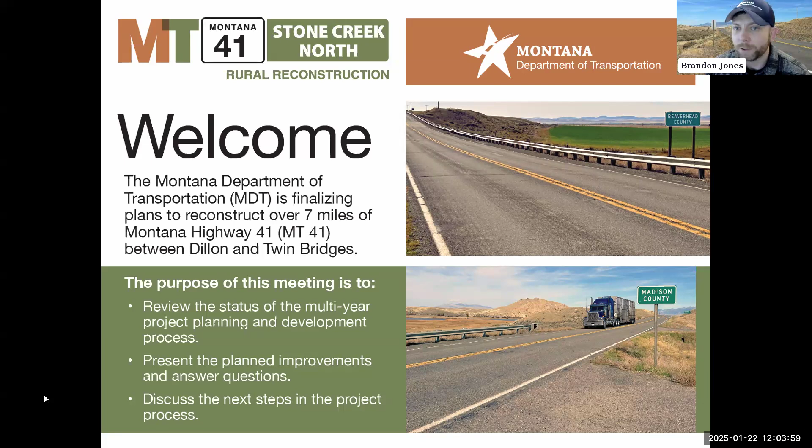And now I'm going to turn the microphone over to the MDT Butte District Pre-Construction Engineer, Brandon Jones. Brandon? Good afternoon, everybody. I'm Brandon Jones, the Butte District Pre-Construction Engineer. I also have here with me David Cunningham, the Butte District Construction Engineer. I just want to read MDT's mission statement before I introduce everybody. MDT's mission is to serve the public by providing a transportation system and services that emphasize quality, safety, cost effectiveness, economic vitality, and sensitivity to the environment.

MDT maintains a staff with the resources and technical expertise needed to perform the workload for the majority of the state's transportation projects. I'm now going to introduce some of the project development team, as well as some district folks, and they'll turn their camera on and introduce themselves. So Rebecca Barbula. Hi, I'm Rebecca Barbula. I'm the Butte District Design Project Manager, and I'm located in Helena Road Design. So my team is responsible for producing the plans and contract documents for construction, and then I'm responsible for managing the project's scope, schedule, and budget.

Thank you, Rebecca. Gino Oliva. Good afternoon, everybody. My name is Gino Oliva. I'm the Butte District Administrator, and I have my office here in Butte, and I supervise Brandon and Dave's groups. Thank you, Gino. Patrick Cross. Hi, everyone. My name's Patrick Cross, and I'm the MDT Butte District Biologist. My role is to work with the design team to minimize environmental impacts, ensure compliance with environmental regulations, and also work with Montana Fish, Wildlife, and Parks on any fish and wildlife concerns that they have.

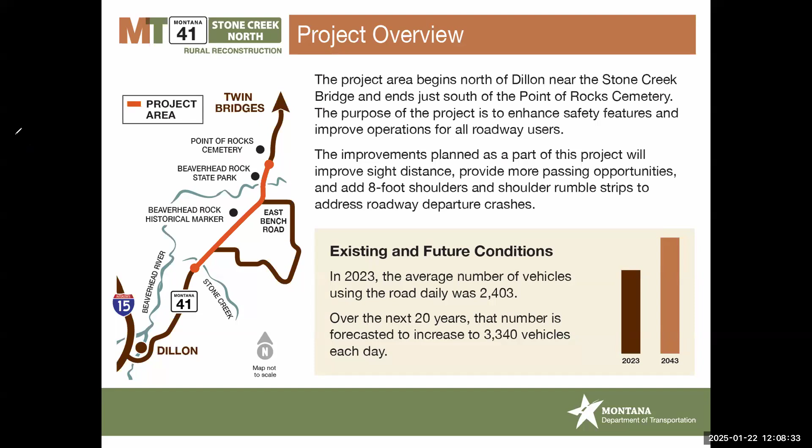MDT began developing this project several years ago. Initial work included gathering and analyzing data, performing field studies, and hosting a public meeting. The information from those evaluations and the input from the public was carefully considered to develop the planned improvements that we're presenting today. This project is now in the final design and beginning the right-of-way acquisition phase.

Over the next about 2 years, MDT will be finalizing the project plans and permits, purchasing any necessary additional property that's needed to construct the improvements, and preparing for construction. The current schedule suggests that the earliest construction could begin is in 2027. Construction is anticipated to take 2 full construction seasons to complete, so summer of 2027 through to summer of 2028.

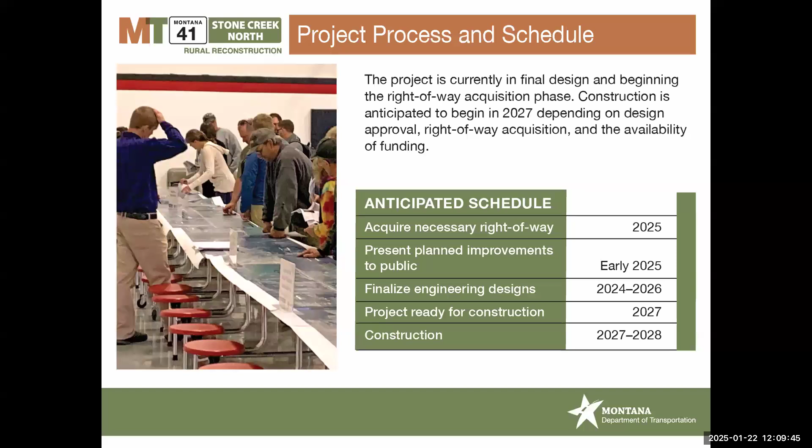However, construction is dependent on funding availability and will be scheduled once design plans are finalized and right-of-way and permits are acquired. And speaking of funding, on the next slide, I'm going to share some information about project costs and where the funding for the project is coming from.

This project is currently estimated to cost about $36 million to construct. MDT has acquired a $23.9 million grant from the Multimodal Project Discretionary Grant that comes from the Infrastructure for Rebuilding America grant program. This grant is overseen by the U.S. Department of Transportation's Office of the Secretary of Transportation.

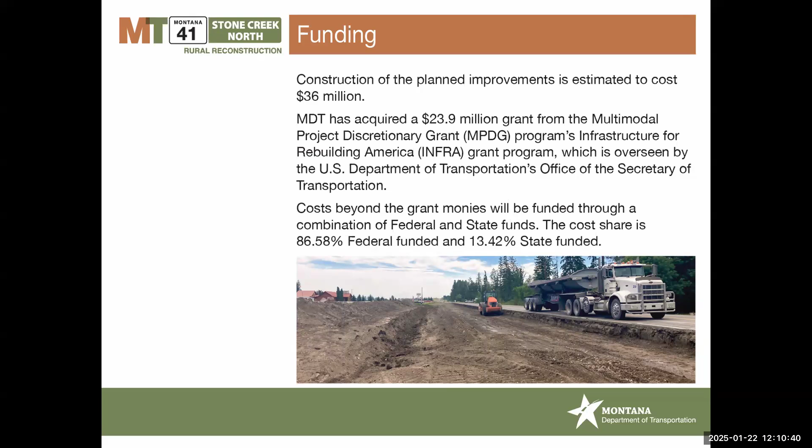Costs beyond the $23.9 million grant monies will be funded through a combination of federal and state funds. The cost share for that is just under about 87% federally funded and about 13% state funded. On the following slides, the design team will talk about planned improvements and design considerations.

As mentioned previously, Highway 41 is currently narrow with steep slopes on both sides of the road and limited sight distance. MDT plans to implement several improvements with this project to enhance the safety features, such as realigning the road north of the Beaverhead River. We're also going to be reducing the vertical grade, that's kind of like the steepness,

of the hills. We're going to be adding 8-foot shoulders, adding shoulder rumble strips on those new 8-foot shoulders and replacing the centerline rumble strips. We're also going to be flattening steep slopes on the side of the roadway and upgrading guardrail and drainage. I mentioned at the beginning the realignment of the roadway north of the Beaverhead River, and I'm going to talk about that a little bit more on the next slide.

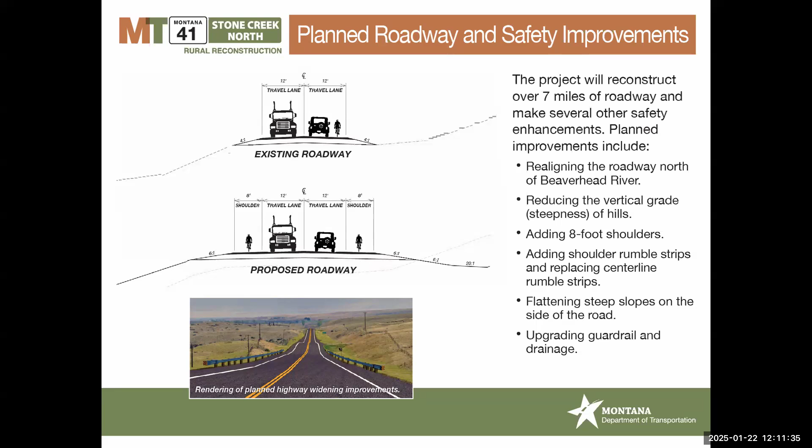MDT teams involved in the design criteria analysis and evaluation included road design, which is my section, the geotechnical section, which is soils and roadway foundation, environmental, which is wildlife, wetlands, permitting, hydraulics, which is drainage, culvert drainage, and irrigation. And then we also had construction and maintenance. That's just to name a few of the various disciplines that were involved.

Additionally, MDT coordinated with external sister agencies on setting the alignment and grade, including the U.S. Army Corps of Engineers and Montana Fish, Wildlife, and Parks. Now I'm going to turn the microphone over to Sam Ulrich, and he's going to talk about environmental impacts that we considered in our design.

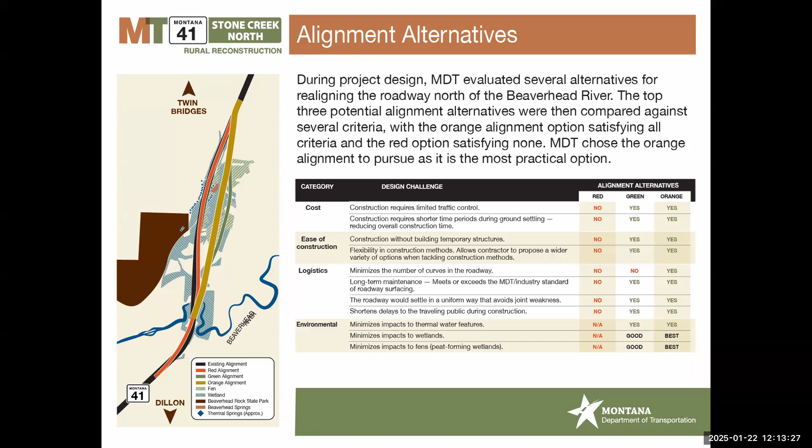Thank you, Rebecca. As with any federally funded project, MDT needs to ensure the project is compliant with the National Environmental Policy Act, often referred to as NEPA, and its Montana companion MEPA. Using the NEPA-MEPA process, agencies like MDT evaluate the environmental and related social and economic effects of our proposed actions. Agencies also provide opportunities for public review and comment on those evaluations and their findings.

When a proposed action may significantly affect the quality of the environment, both NEPA and MEPA require the agency to prepare an environmental impact statement. Most of MDT's projects, including this one, fall under a categorical exclusion. MDT's categorical exclusion form is basically a miniature environmental impact statement. This project is being reviewed under NEPA. This review includes a few other important federal acts.

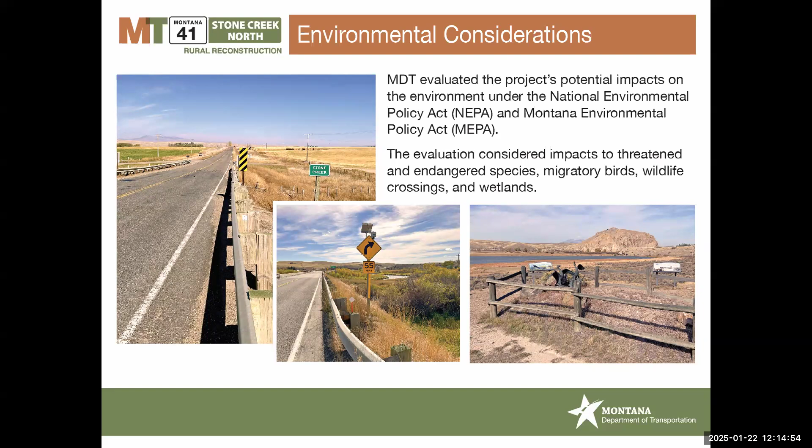They include the Endangered Species Act for the handful of listed species near the project area, the Migratory Bird Treaty Act for nesting areas on the underside of the bridges, Section 404 of the Clean Water Act for impacts to aquatic resources, including wetlands, and Section 106 of the National Historic Preservation Act for effects on historic properties. Additionally, other areas of consideration include wildlife crossings and recreational river activities.

For this project, MDT conducted site investigations to look for potential environmental concerns and document the environmental baseline in the project area. Our analysis showed that the project should include specifications necessary to protect the environment. And I will now turn it over to the biologist, Patrick Cross, to talk more about proposed environmental features included in our design.

Thanks, Sam. So to minimize our environmental impact, in addition to the design features, certain construction activities will also have seasonal timing restrictions to avoid disturbing protected wildlife species in the area and ensure compliance with the environmental regulations that Sam mentioned. Some examples include for trout conservation, there will be no in-stream construction work during the trout spawning seasons in the spring and fall. And that's part of our Montana Stream Protection Act permitting requirements, which are administered by Montana Fish, Wildlife, and Parks.

Part of the stream permitting compliance will also require that any equipment used for in-stream work is first inspected for aquatic invasive species before the project begins. For Migratory Bird Treaty Act compliance, any tree and shrub removal, as well as removal of the Beaverhead River Bridge, basically any place where birds might be nesting, must occur outside of the nesting season, which is from mid-April to mid-August. An exception could be if the contractor uses special methods of deterring nesting under the bridge, like installing nets that block access before the migratory birds arrive.

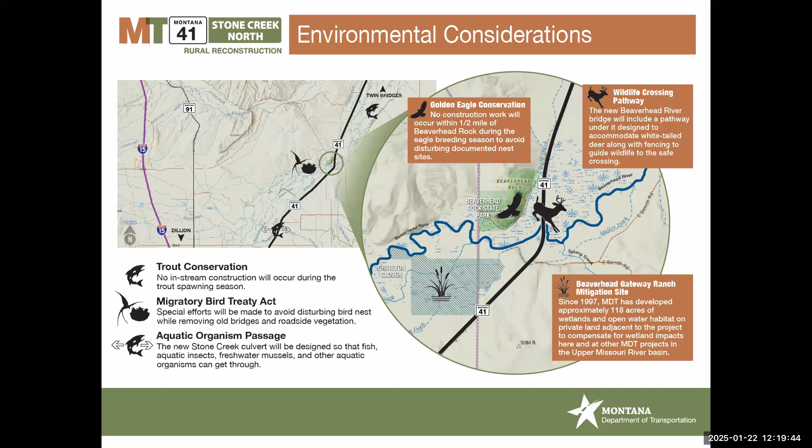And the way it works is that every MDT project is first reviewed for wildlife accommodation needs and opportunities. And if recommendations are made, those then have to work their way through all the MDT bureaus for review and final approval. So approved wildlife recommendations for this project include, and can I get a slide change, please? Perfect, thank you.

They'll include a wildlife path that will be built under the Beaverhead River Bridge that'll be sized so it has enough headroom for white-tailed deer to get through. There will also be wildlife barrier fencing, and this is 8-foot tall woven wire fence that'll be installed on either side of the Beaverhead River Bridge. And the goal of that is to help guide wildlife to the path under the bridge.

The barrier fence will also include wildlife jump outs, which are one-way escape ramps that let the animals jump out away from the road, but not jump in towards it. There will be wildlife guards, which are like double wide cattle guards installed at approach roads and driveways to help minimize the new fence's impacts on local traffic.

We're also considering putting an experimental electric wildlife deterrent mat at the fence ends to prevent wildlife from getting into the fence section. And there's an example of one of these near Toston on US 287 between Three Forks and Helena that's been working for a couple of years. And then finally, for this wildlife barrier fence section, there will also be wildlife warning signs with flashing lights at the fence ends.

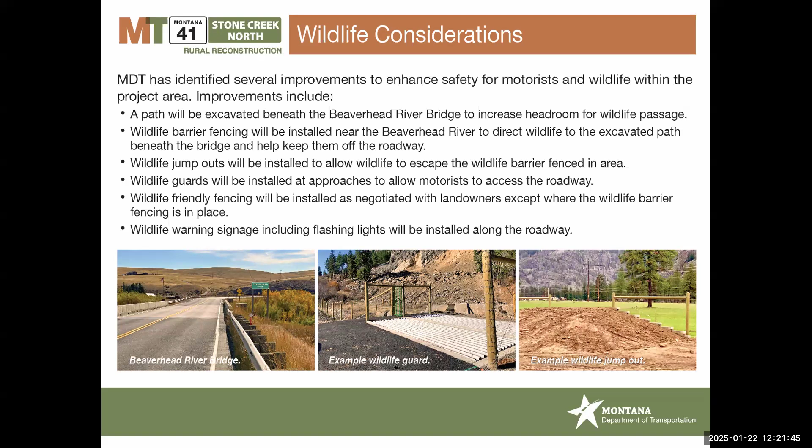So now I think I'm turning it back to Rebecca to continue talking about some of the design features in particular. Perfect. Yeah, thanks, Patrick. So there are two bridges that exist within the project limits. One of them is at Stone Creek and one is at Beaverhead River. So I'll discuss planned improvements for both of the structures.

And I'm going to start with the Stone Creek Bridge, which is located at the beginning of the project near milepost 9. So I know Patrick talked about this a little bit, but we're going to be replacing the Stone Creek Bridge with a double cell concrete box culvert for both stream and livestock passage. So MDT completed analyses to determine the culvert size that's required, as well as the location to align the stream side of the box culvert with the natural stream bed.

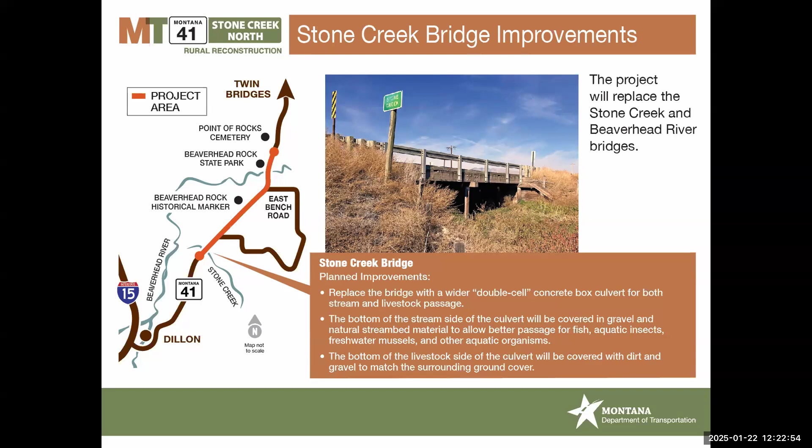And then the bottom of the stream side of the culvert will be covered with gravel and natural stream bed materials to provide better passage for fish and other aquatic organisms that Patrick had talked about. And then the bottom of the livestock side of the culvert will be covered with dirt and gravel to match the surrounding ground cover. And now I'm going to move over to the Beaverhead River Bridge.

So the Beaverhead River Bridge is located near milepost 14.7. It's partway between East Bench Road and Beaverhead Rock Road, which is the road that goes up to the Beaverhead Rock State Park. So MDT is going to be removing and replacing the Beaverhead River Bridge with a new structure. The new bridge is going to be about 181 feet long. It's going to be a single span design, which means that there are going to be no piers. And so this allows for improved movement and passage of wildlife underneath the structure.

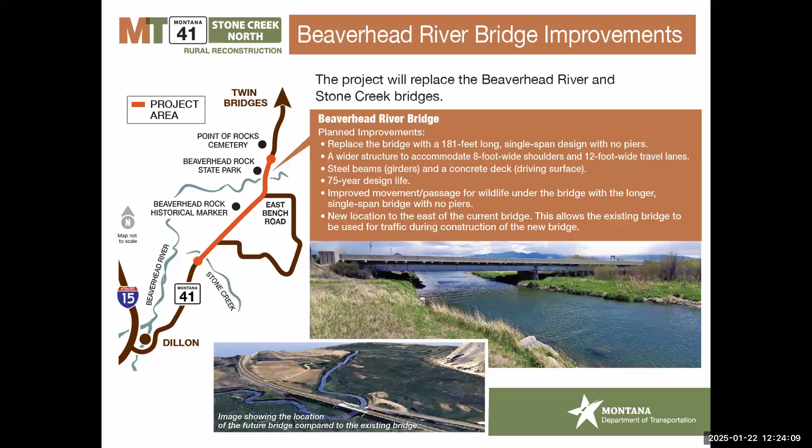Additionally, the new bridge will be widened to accommodate 12-foot travel lanes and 8-foot shoulders to match the rest of the project. And then the new structure will have a 75-year design life with steel beams, also called girders, and then a concrete deck, which is the driving surface that everybody will be using. And then the new structure will be built to the east of the current bridge, which allows us to use the existing bridge for traffic during construction. And I'll talk a little bit more about traffic control on the next slide.

So the final traffic control plans have not been fully developed. However, we're moving forward with plans to construct some of the highway and the Beaverhead River Bridge to the side of the current highway to minimize impacts and delays during construction. So mostly from the Beaverhead River Bridge, I think it's about a mile or a mile and a half to the north where we're kind of off of the existing alignment. So that's where we'll be constructing the new highway adjacent to the existing highway.

And MDT will require the contractor to keep access to homes and properties open during construction. There may be short-term closures when new asphalt is laid in front of an access, but the contractor will communicate with those property owners during those times. And then emergency vehicles will always be accommodated through the construction work zones as well. And we will have more information about traffic control and how to stay informed as construction gets a little bit closer.

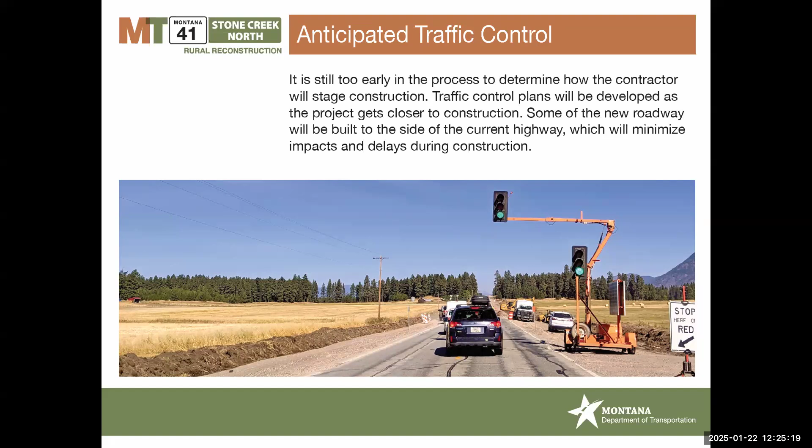So now I'm going to turn the microphone back over to Brandon Coates from RBCI to talk about the next steps in the project. Thank you, Rebecca. Yeah, as we discussed earlier in the presentation, we're currently in the final design and beginning the right-of-way acquisition phase of the project. So the design team will continue finalizing all the contract documents for construction and acquiring property that's necessary to build the project. And at this stage of the design, minor changes will be evaluated and negotiated with landowners, but major changes such as moving the alignment or adding turn lanes are no longer feasible.

Once the plans are finalized, right-of-way is acquired, and the funding has been allocated, the project will then be let to contractors for bidding. Construction will be announced once the funding and bidding process is complete. And again, the current schedule suggests that the earliest construction could begin is in 2027.

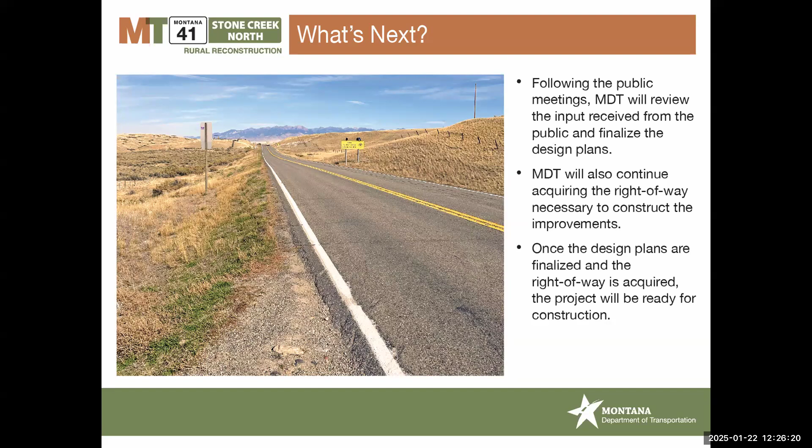And as the project transitions into construction, MDT is planning to use a variety of methods to communicate with the public during construction, including updates to the project website, local news media, and social media. So please visit that project website to get the most up-to-date information as we get closer to construction as well. So I think we'll now begin the question and answer session. So Tyler, do we have any questions from the group so far?

We do. We had several. The first question was asked by Perry, and Perry asked how much property do we plan to acquire for the new construction on this project, and then had a follow-up of how many landowners will be affected by the needed acquisitions. Therese, did you want to answer that question? Yeah, I'm sorry, I answered it in the chat. So it's roughly 45 acres of either new easement or new right-of-way and fee. And that will be from roughly 17 landowners.